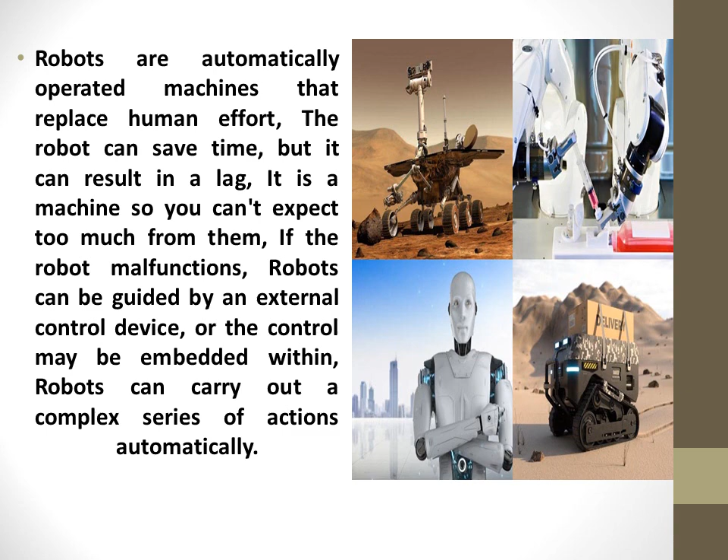Applications of robotics.

Robots can be used at home. They can help with chores, remind us of our schedules, and even entertain our kids. Such as the autonomous vacuum cleaner Roomba, robots can be used in autonomously mowing grass and cleaning pools. Robots can help elderly individuals, and they can complete food delivery.

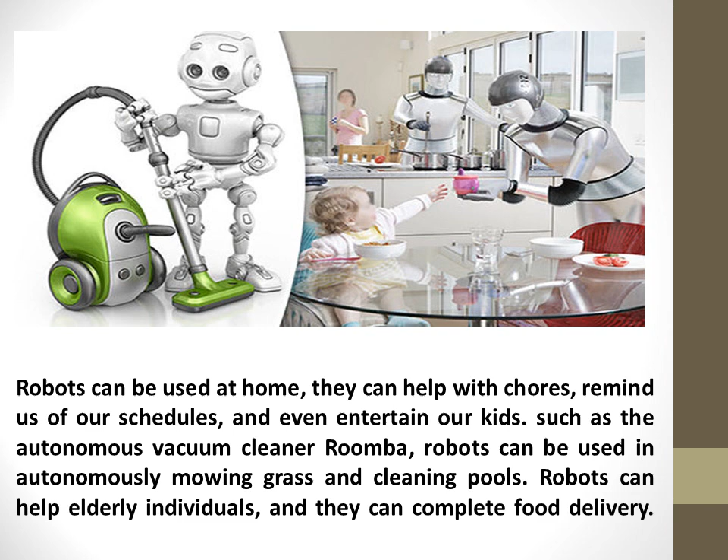Robots are used in fighting forest fires. Robots can be used in hospitals, hotels, and on roads. They are used in healthcare to assist in surgical procedures. Robots are used by pharmaceutical companies to help fight COVID-19. They are used to fill and seal COVID-19 testing swabs, and they are used by some manufacturers to produce PPE and respirators.

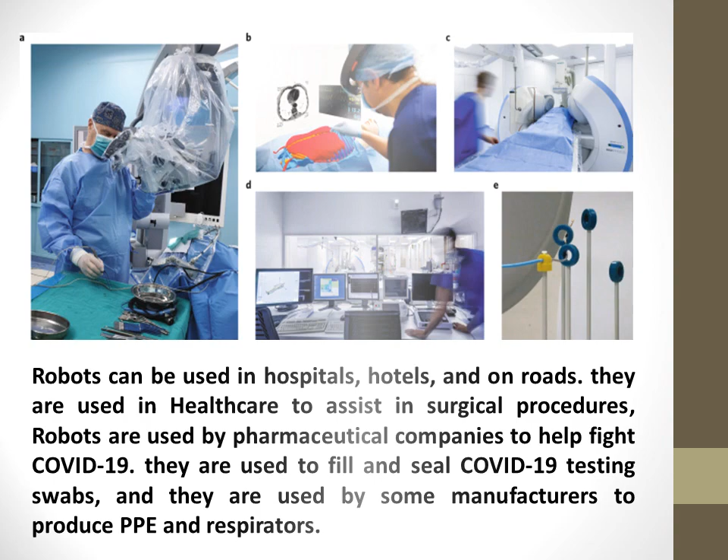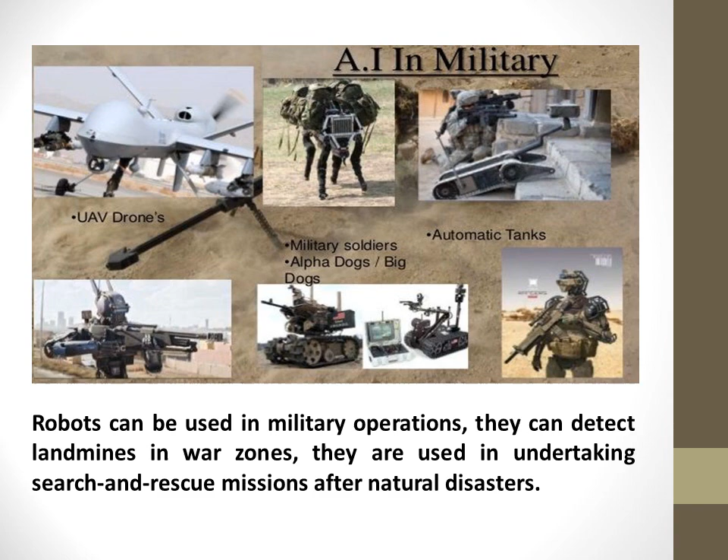Robots can be used in military operations. They can detect landmines in war zones. They are used in undertaking search and rescue missions after natural disasters.

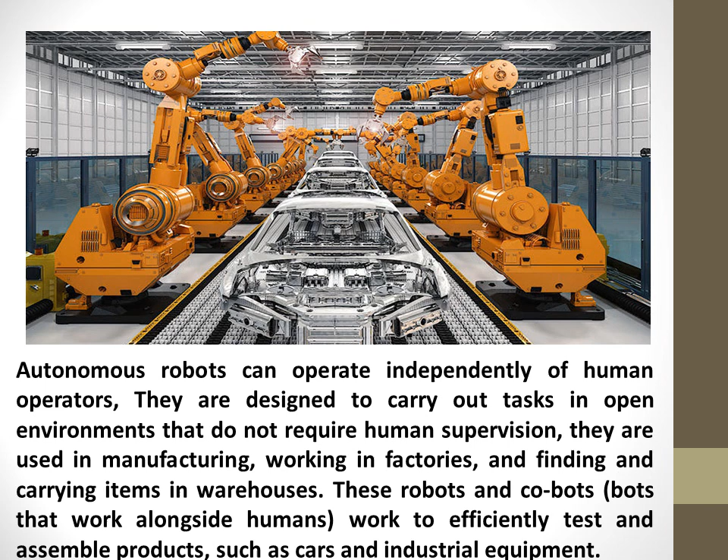Autonomous robots can operate independently of human operators. They are designed to carry out tasks in open environments that do not require human supervision. They are used in manufacturing, working in factories, and finding and carrying items in warehouses. These robots and cobots, bots that work alongside humans, work to efficiently test and assemble products, such as cars and industrial equipment.

Humanoid robots look like or mimic human behavior. These robots usually perform human-like activities, like running, jumping, and carrying objects, and they are designed to look like us, even having human faces and expressions.

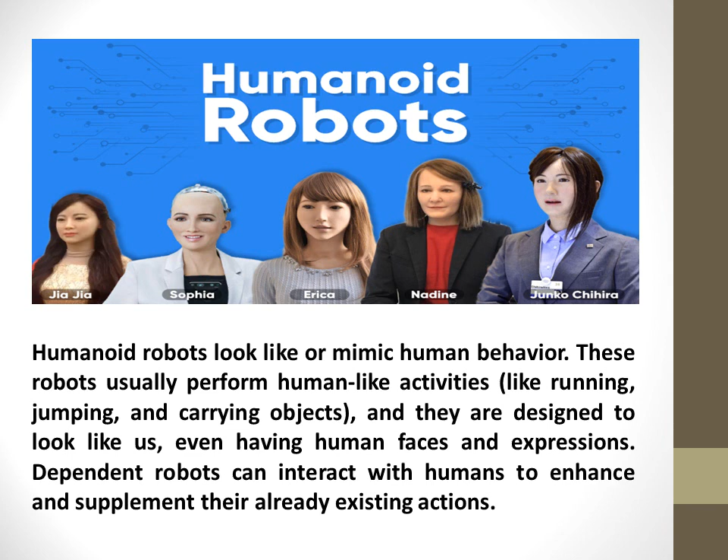Dependent robots can interact with humans to enhance and supplement their already existing actions. Augmenting robots are known as VR robots. They can enhance current human capabilities or replace the capabilities a human may have lost, such as robotic prosthetic limbs or exoskeletons used to lift hefty weights.

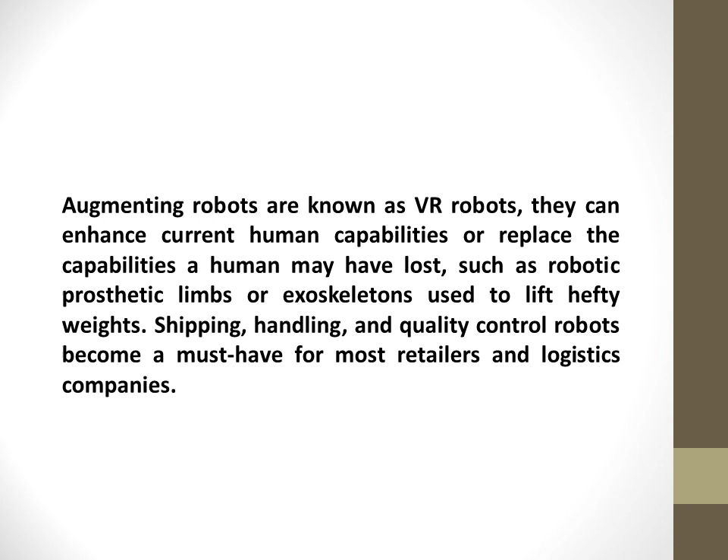Shipping, handling, and quality control robots become a must-have for most retailers and logistics companies.

Advantages of robots.

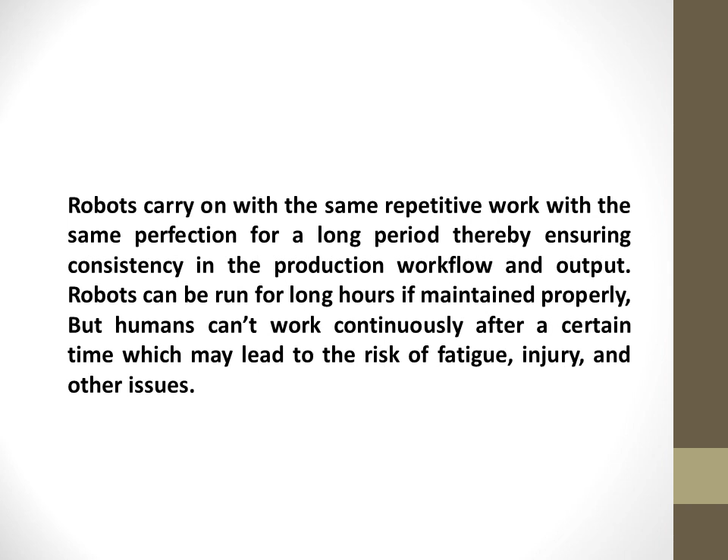Robots carry on with the same repetitive work with the same perfection for a long period, thereby ensuring consistency in the production workflow and output. Robots can be run for long hours if maintained properly, but humans can't work continuously after a certain time, which may lead to the risk of fatigue, injury, and other issues.

Robots increase productivity, efficiency, quality, and consistency of products. Unlike humans, robots don't get bored. Until robots wear out, they can do the same thing again and again. They are very accurate. Robots don't have the same environmental requirements that humans do, such as lighting, air conditioning, or noise protection.

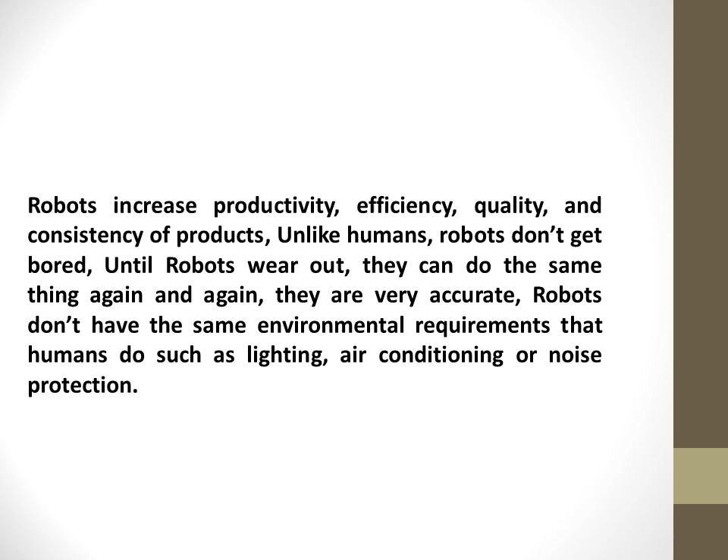Robots can be set to work on a repetitive cycle continuously without any break, thereby increasing the production rate. This results in higher output that helps in the recovery of cost and makes profits further. They are cost-effective, they improve the quality. Manual involvement in repetitive tasks may affect concentration levels and can lead to errors and quality failures.

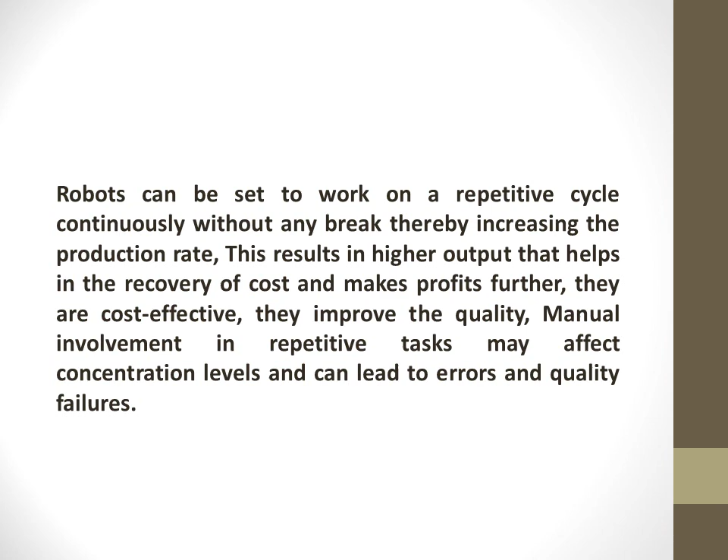Robots contain some sensors, actuators which are more capable than humans. They can work in environments that are unsafe for humans, such as in the nuclear or chemical industries.

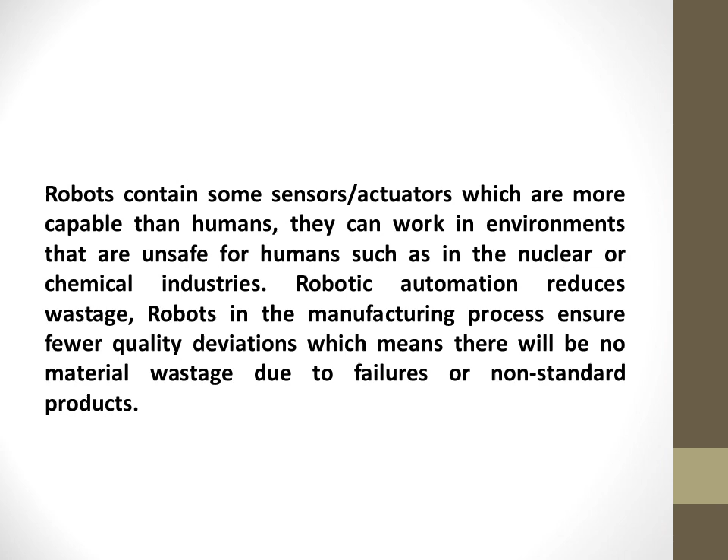Robotic automation reduces wastage. Robots in the manufacturing process ensure fewer quality deviations, which means there will be no material wastage due to failures or non-standard products. Robots eliminate the risks by accurately producing and checking items as per specified standards. Products manufactured with more precision and consistent quality create new business possibilities for companies.

Robotic automation relieves the workforce from routine, laborious work and engages them in other tasks that allow them to expand their skills. This will create a better environment from which the business as a whole will benefit.

Robots are used in hazardous environments. Workers may work in unsuitable or dangerous environments that lead to health issues and safety risks. Automated robots can be designed and deployed to work in any environment without posing any risk to organizations and their workforce.

Disadvantages of robots.

Robots don't have a sense of emotions or conscience, they lack empathy. Robots can operate on the basis of information fed to them through a chip. When one thing goes wrong, the entire company bears a loss. However, robots can be superior to humans in some ways. They don't have the power to think, analyze and create by taking information from their surroundings.

Robots can only do what they are told to do. They can't improvise. They can be superior to humans, but they are less dexterous than humans. They don't have powerful brains, and can't compete with a human's ability to understand what they can see.

Robots are very expensive, in terms of the initial cost, installation, maintenance, the need for extra components and the need to be programmed to do the task. Robotic automation comes with high investment costs. Robotic automation needs a constant power supply that involves extra costs.